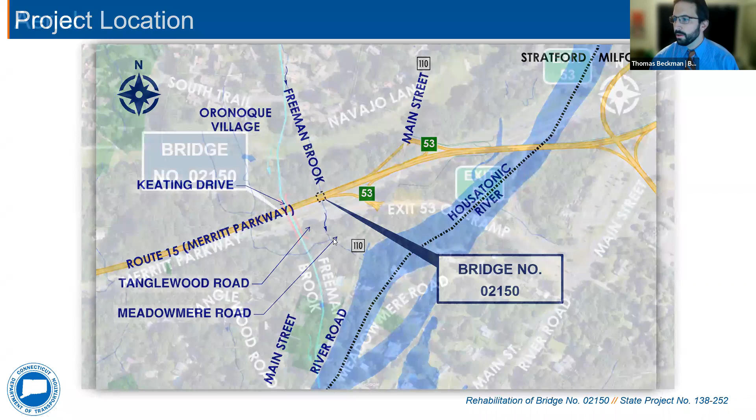We are now looking at that same area as an aerial view. Our subject bridge is shown in red in the center of the screen. Again, Freeman Brook is the light blue line running up and down, and the Merritt Parkway runs left and right. Interchange 53 is to the right of our bridge. To the north of our project area is the Oronoque Village condominiums and the Oronoque Village Country Club. To the south is a residential neighborhood made up of Meadowmere Road and Tanglewood Road.

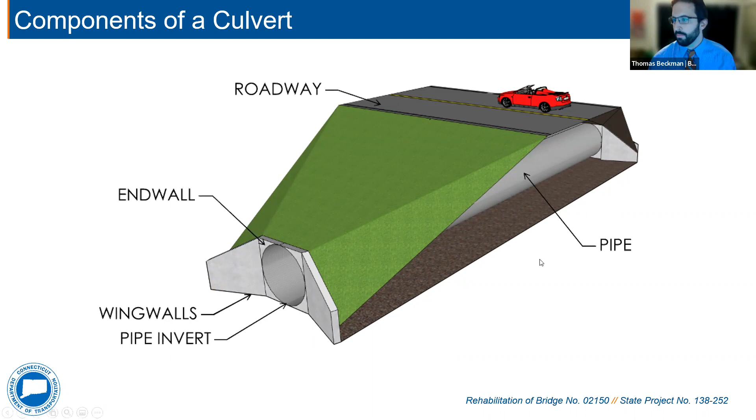The next few slides are going to introduce you to the structure. Bridge 2150 is a 201 foot long, 10 foot wide by 8 foot high, cast in place concrete box culvert. It was constructed in 1941 as part of the Merritt Parkway's construction. The average daily traffic, or ADT, for the Merritt in this area is approximately 86,000 vehicles per day.

There is a concrete encased sanitary main running through the culvert, which is owned by the town of Stratford Water Pollution Control Authority, and it was constructed in 1971.

The photo on the left here shows a photo of the inlet of our culvert. Here you can see the end wall and wing walls, as previously discussed, as well as the culvert structure. Additionally, this concrete structure running through the right side of the culvert is the sanitary main and its concrete encasement.

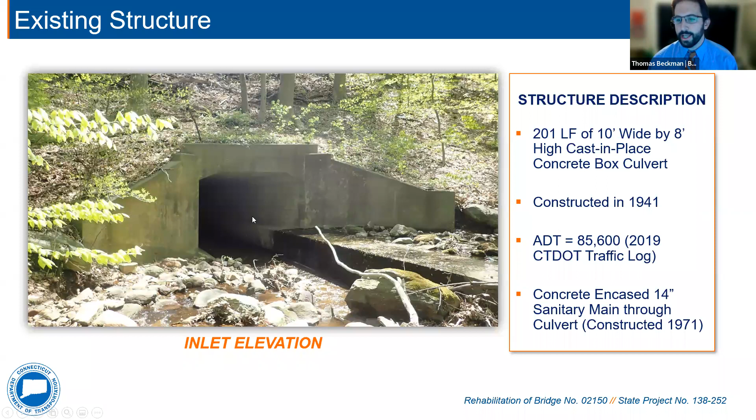A few more photos of our culvert. On the left is now looking at the outlet. Again, we have our end wall and wing walls. On the left here, the sanitary main is running away from the culvert.

You can also observe some staining across the encasement in this location. That is due to a storm drain outlet uphill of this location and that water running over the sanitary main. There, you also notice the voids below the encasement as well as the wing wall footing. Those will be addressed as part of this project.

The photo on the right is looking through the culvert downstream. On the right is the concrete encasement for the sanitary main. On the left, you can see some staining of the concrete, which is due to water seeping through the culvert wall. Again, this will be addressed as part of the project.

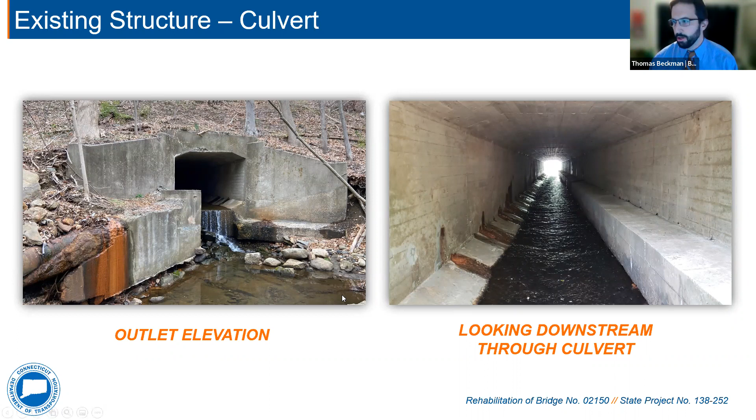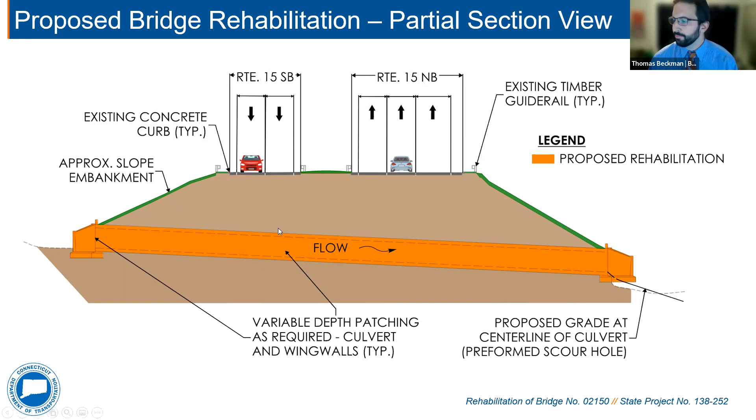The project will require a temporary access road in order to allow the contractor access from the roadways to the culvert outlet. Again, please note, this design is preliminary and will be refined as it progresses.

At the completion of construction, the temporary roadway surface will be removed and the disturbed area will be graded to match existing as well as revegetated.

As previously noted, there is a partial sanitary sewer main replacement that will be coordinated with the Town of Stratford Water Pollution Control Authority. There are anticipated environmental permits associated with the project.

These include the U.S. Army Corps of Engineers pre-construction notification, the Connecticut Department of Energy and Environmental Protection pre-construction notification general permit for Connecticut, and the Connecticut Department of Energy and Environmental Protection individual inland, wetland, and watercourse permit.

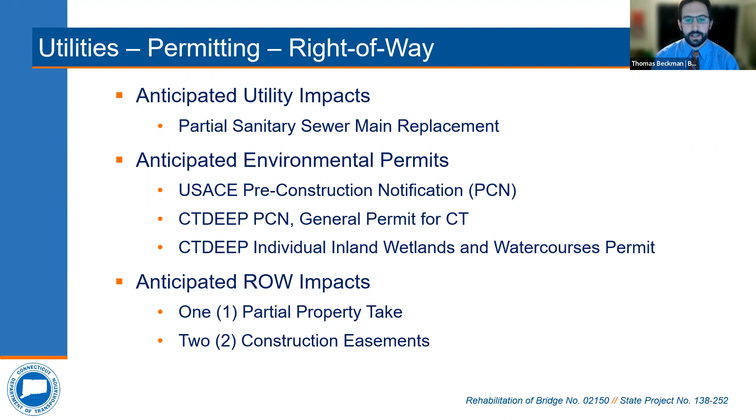There are anticipated right-of-way impacts with the project, including a partial property take, as well as 2 construction easements.

The department has coordinated with the Town of Stratford on the project on June 28th of 2022. The department has also presented the project to the Merritt Parkway Advisory Committee on July 20th of 2022, and the project was well received. There will be additional coordination with the Merritt Parkway Advisory Committee and the town as the project progresses.

I will now turn the presentation over to Matt Geanacopoulos with the department's right-of-way unit to review the right-of-way process. Thanks, Tom. I'm Matt Geanacopoulos.

I'm a project coordinator with the department's Division of Rights-of-Way. It is our office's responsibility to acquire the property rights that are needed for transportation projects. As Tom just mentioned, the proposed project design does require the acquisition of some construction easements and one small partial property take. So I'm just here tonight to give you a brief rundown of our right-of-way acquisition process.

Before I do that, I just want to elaborate a little bit on what we mean by construction easements. The department buys construction easements when we need to use a portion of private property to allow for the construction of the project, but the owner still retains ownership of the property, and upon completion of the project, those get released and all rights revert back to the owner.

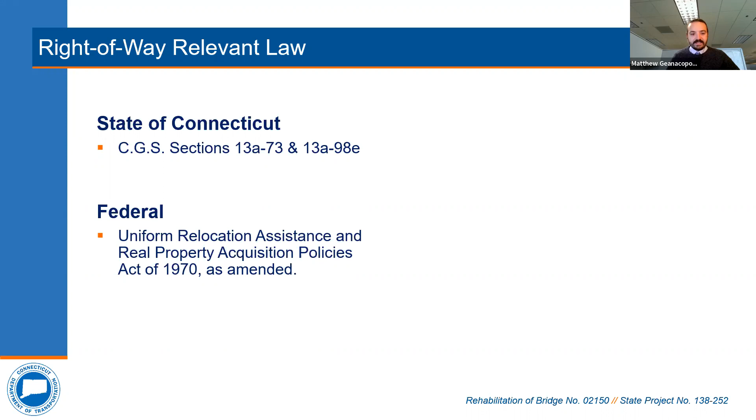Now, when the design has progressed to the point where we know exactly what we need and we're ready to begin the right-of-way acquisition process, each impacted property owner receives a letter of intent to acquire from our office, along with a property map, which depicts the exact rights to be acquired.

Our office determines the fair market value of those rights, and we use that to establish an offer of just compensation. That offer is sent out to the property owner in writing, and a right-of-way agent from our office is available to meet with the owner, and they can explain in detail the project, the impacts to the owner's property, and explain how the state came up with their offer.

The property owner has a reasonable time to consider the offer and enter into negotiations if they choose. Once an agreement is reached, the state prepares all the necessary paperwork to transfer those rights. So they'll prepare a deed, any necessary subordinations to any mortgages, and they'll file the deed and the property map on the town land records.

However, if negotiations reach an impasse, in order to keep the project on schedule, the department may acquire the rights it needs through its power of eminent domain. And what happens in that case is the department files a notice in the local superior court, along with a monetary deposit in the amount of the state's original offer of just compensation.

The property owner would have 6 months from that date to file an appeal if they felt the offer was inadequate. Whether or not the owner chooses to elect their right to appeal, the money deposited in the court is available to be withdrawn by the owner at any time.

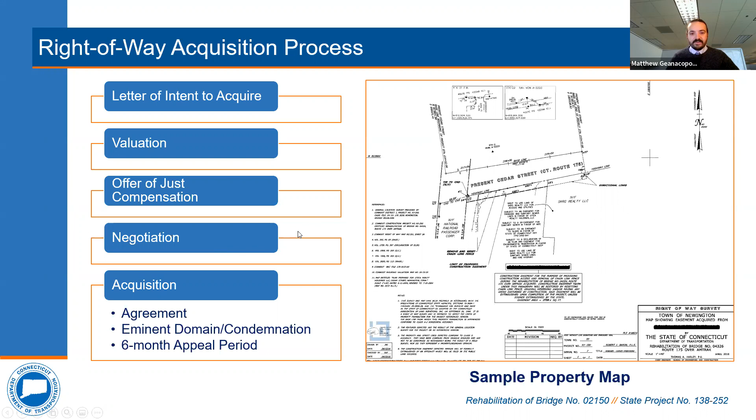Great, thanks Matt. A few last items here: the estimated construction cost for this project is currently $1.5 million, to be funded with 100% state funds. There will be no town funds required for this project. Construction is anticipated to begin in spring of 2026 and end in fall of 2026. The schedule is preliminary and is predicated upon the availability of funding.

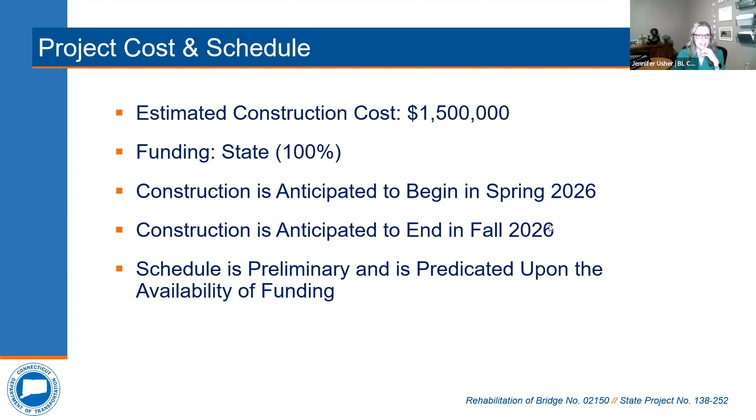Thank you, Tom. We have a question from a Ms. Hunting. She is asking what the exact property address is that the state is looking to obtain a take on. Tom, if you could flip back to that slide, and then I can hand the question over to Matt Geanacopoulos with the ConDOT rights of way unit.

Thank you for the question and for flipping to that plan sheet. The addresses we're showing are 400 Keating Drive and 144 Meadowmere Road. We're not looking to take over the entirety of the properties, just a small portion by the structure itself. But again, we don't anticipate impacting any structures, any homes or anything like that, just the vacant areas right in the limits of the brook.

Thank you, Matt. I hope that addresses her question. We will move on to our next question.

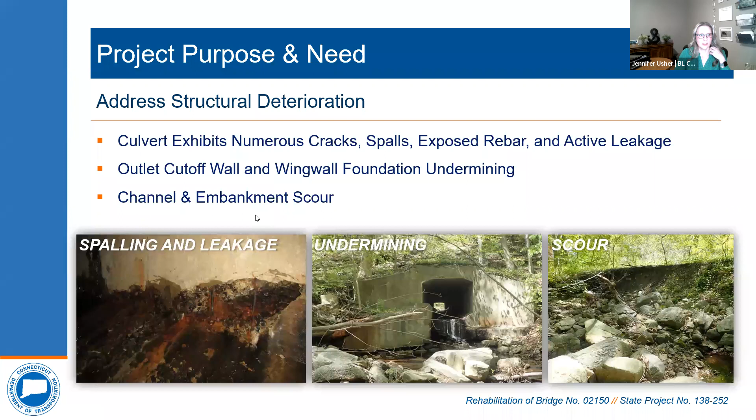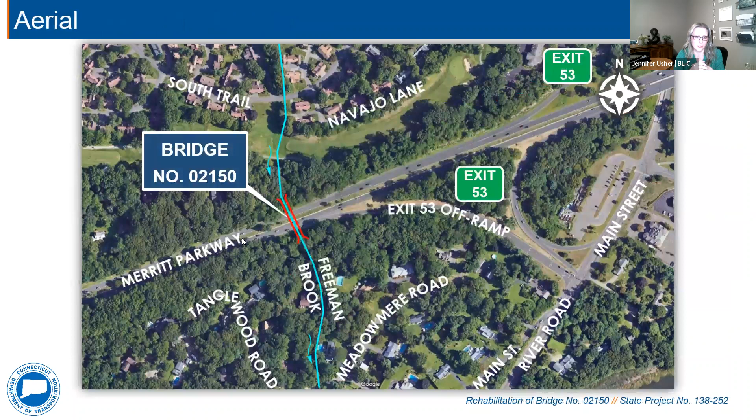It looks like we've got a good turnout this evening, which I'll tell you, as part of the project team having done probably a couple dozen of these, we really appreciate getting this input. Love answering your questions. We want to make sure we're reaching out to everyone in the public, really at the early stages. No design has really been done on this yet in any great length. So this is the time where we really want to hear your concerns so we have time to incorporate that. So thank you for taking time out of your day to join us and listen to what we have about this project.

So with that, our next question is from Ms. Cooney, asking: is this brook the same brook that runs from the Parkway through my property? Her property is 172 Meadowmere. I'll turn that over to Tom Beckman with BL Companies. Thank you, Jennifer. I brought us back to our project location map to help illustrate Freeman Brook's path. Our bridge is here. Freeman Brook runs below Tanglewood, under Main Street, under River Road. I believe your property at 172 Meadowmere is located approximately in this location, so yes, it is the same brook that runs through your property.

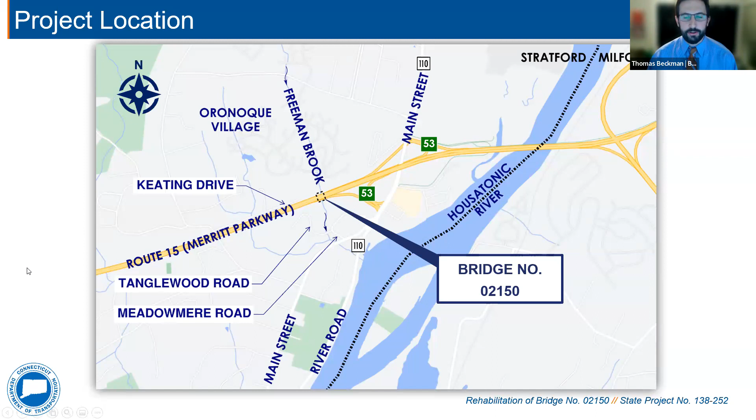All right, thank you, Tom. Moving right along, we have a question coming back from Ms. Hunting, and she is asking what hours and days the construction will be taking place. Let's see, who can I turn that over to answer?

I think I'm going to have to turn that back to Tom. Tom, I'll hand it to you. Oh, I'm sorry, Mike Woods is actually going to take that. Thank you, yeah, sorry, apologize, was having some issues with the mouse, little delay. Love our digital world here.

Another good question. Obviously, with the close proximity to the residential houses right there, the intent is not to have nighttime work. We're trying to do this during the day, likely Monday through Friday. This is still something we're coordinating locally with the town to get their input, along with these public input meetings to hear people's concerns. But it'll likely be typical construction timeframes, during the day, nothing overnight. We don't expect anything overnight or on weekends either. I'd expect Monday through Friday, maybe 8 to 5 duration, something like that. Hope that clarifies things and alleviates any potential concern.

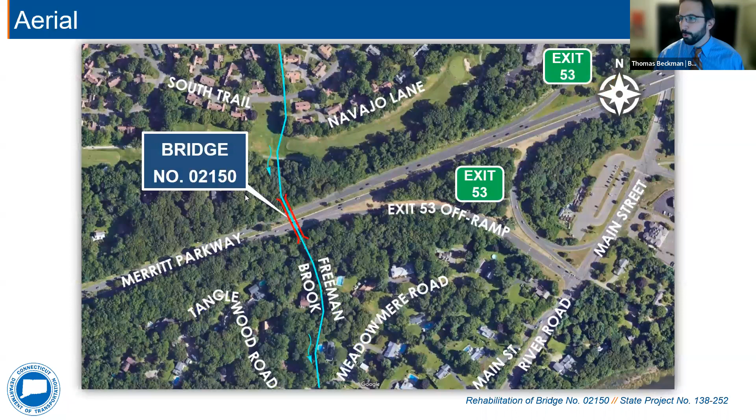Thank you, Jennifer, and again, great question. For the work associated with the culvert, the contractor will just be utilizing the temporary access road that will be shown once I come to that slide again. In order to perform the work on the culvert, there will be no traffic coming off the Merritt Parkway. Although, as part of the storm drain cleaning and rehabilitation, I had mentioned previously that the contractor may have to do short-term shoulder closures to allow that work to be completed.

Thank you, Tom. If you don't mind, I just want to circle back on Ms. Cooney's question regarding the brook, and she was wondering if it was the same brook going through her property. The project team took a look at the GIS, and it looks like it may not be the actual brook. It may actually just be a smaller tributary that goes through your property and then empties into the Freeman Brook. So just to help clarify that.

All right, I'll turn back to our Q&A to see what we have here. We have a question asking how it was determined that this project needed to be done. Was it a routine inspection or is there a current problem? I'll take that. One of my roles for BL Companies is as the program lead for the CLE program that we work with CONDOT on. The way a project actually comes to us is through routine inspection, usually.

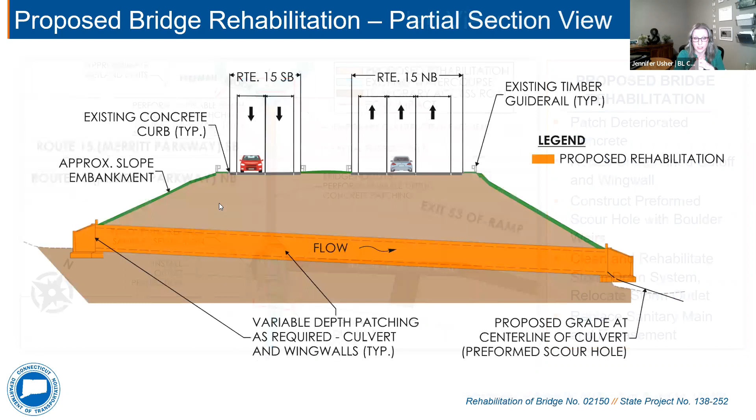I can answer that a little bit and then hand it over to one of my colleagues to expand. The amount of clearing needed for the access road is very small compared to the watershed area that is probably affecting your property, so hopefully you can take some comfort in that. But let me turn it over to Tom Beckman, who can give a more detailed answer.

Thank you, Jennifer. We do want to acknowledge we received your emails earlier today with this question, and it allowed us to do a little research, which we appreciate. We were able to pull your septic system as-built from the town records, and we understand the pumping system you have in place and your concerns with the high water table in this area.

Again, what we're showing here is a preliminary design. As a designer starts the project, they will conduct investigations, and now that we know this area is of concern, we'll ensure that is communicated so they can identify the high water level table you're indicating is there. Once identified, it will allow them to incorporate design methods to address that during construction, ensuring a stable access road, as well as avoiding moving underground water to the best means capable.

Thank you, Tom. I'll just add, we understand there are obviously some concerns you have being that close, and we can certainly keep you updated on the project and work with you throughout this. If you want to send your contact information to the project email, that's in the chat, that would be the most helpful thing so we can keep communication open during this process.

It looks like we're talking about some sort of existing structure that potentially runs underneath Tanglewood out here. Our project is specifically the culvert underneath the Merritt Parkway. The structure that is potentially underneath or over Tanglewood here is beyond the intended limits of this project, so we are not expecting to do anything with that right now.

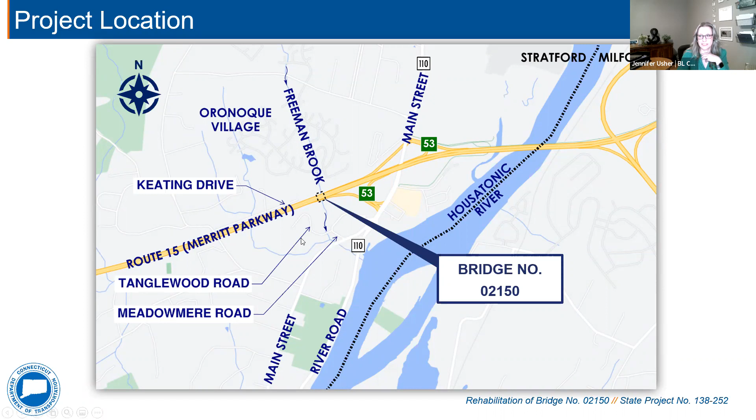Hopefully that is the area that Ms. Simon was talking about. Again, if we haven't answered any of the questions you may be posing tonight in this forum adequately or completely, please give us a little more detail. We will stay here as long as you guys have questions and comments, so just be patient. We will get through everything.

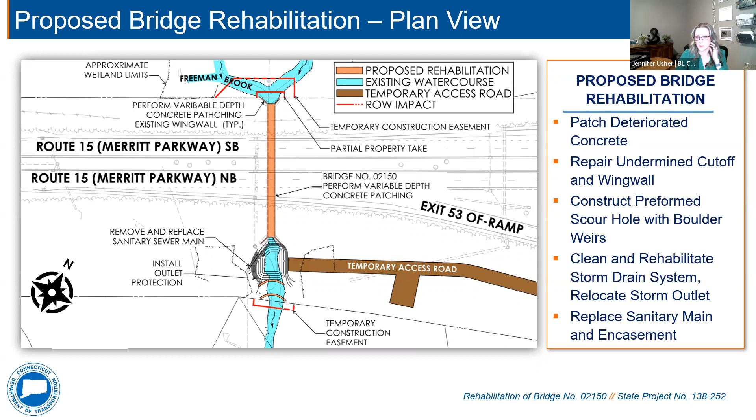So I'm going to move to our next question, also from 222 Meadowmere Road. The boundary line between the new road and my land is the least wide of all the houses. Just a few feet lie between my property and a steep incline up to the Merritt Parkway ramp. It looks like a very narrow spot for huge trucks. Will there be any barrier between my yard and the road? I have 4 children and a dog.

That's a very important question. I think I can probably just address that. We are in the conceptual design stage right now, which is the very first part of this. So as we progress in the design and finalize it and add a little more detail, we can certainly take a look into the state providing some sort of temporary barrier or fence in that area, just to make sure we don't want a dog or children coming into the construction area. The state would certainly want to do what it can to prevent that. So we'll further look into that and make a note that that is a concern for that property, which is 222 Meadowmere Road.

I will just note that I answered that one. All right, we'll move on to Anson Davis asking - this kind of has to do with the project, but how do the bridges get their numbers? I love this question.

That is a great question that I'm going to hand over to someone at the department, DOT. So who from the department would like to answer that question? I am going to hand it over to the former head of the bridge management group, Al Garcia.